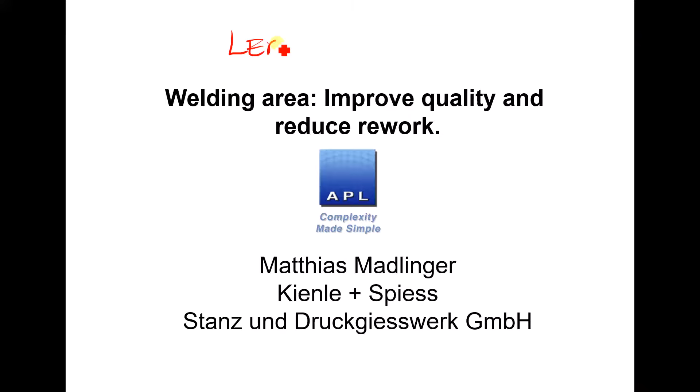Let's get into this case study, which is very much Lean and Six Sigma working together. The ultimate project you're going to see is about improving the quality of welding. But first we have to find that problem. There's a certain amount of German on these slides, which I apologize for in advance, but it was a German client. So let's take a look at what's going on.

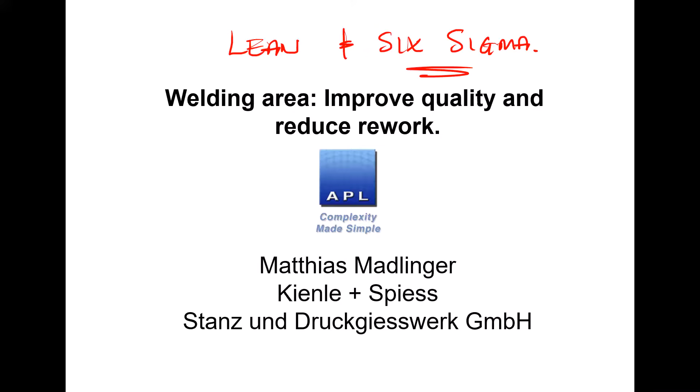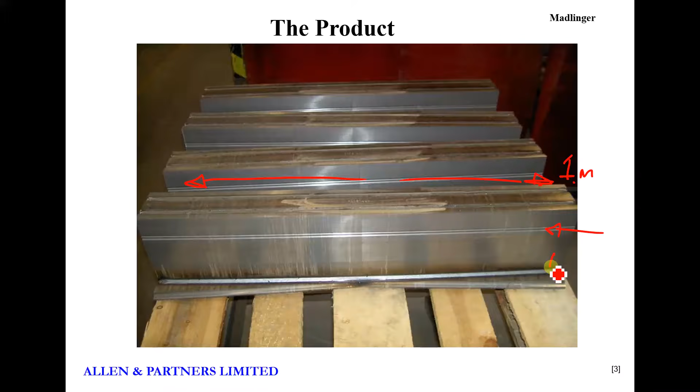Here's the product. Let's have a look. It's about 1 meter wide, this thing. It's an iron core that is part of power generation equipment. So it goes into a power station. The iron core is part of the large transformer that creates electricity. So you don't want this thing to fall to pieces.

And the way that it's made, you have slices of metal here, you can just see them. And then what we do is we weld across the top and across the edges to weld all these pieces together to form the iron core. So that's the product, that's what we're making.

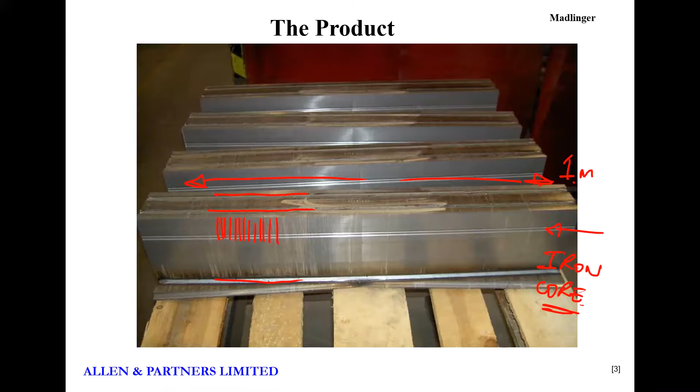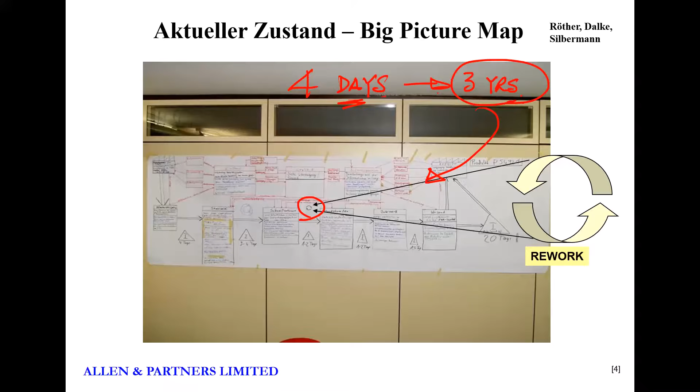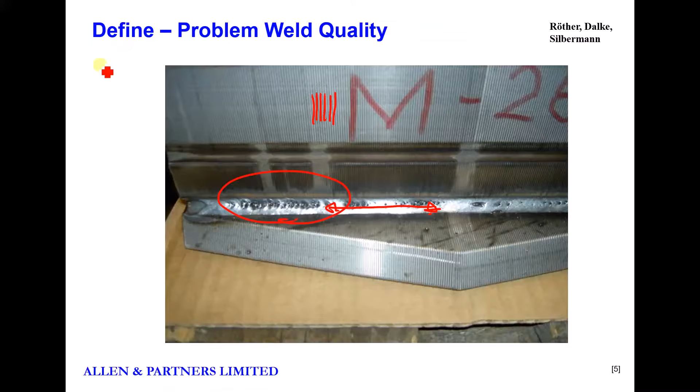So that's our problem. Now, it's a technical problem. So once you get a technical problem, we've been looking at a lean tool, we've been looking at a value stream map, a big picture map, but now we have a technical problem. And the minute you have a technical problem, well, I'm going to switch toolkits, because suddenly this is a Six Sigma problem. It is a perfect Six Sigma problem.

Now, one of the things we need to do before we get this project up and underway, we're thinking about define and measure in the early parts of the project. The current problem, the current measure, look, is the welding looks terrible. That's not really a great measure. We need to find a better measure in order to make the problem easier to understand.

Now, talking to the team, I'm not a welding expert, but talking to the team, what they said was, you get these dots of spatter. The dots of spatter are a bad sign, that's bad welding. So the more dots of spatter we get, the worse the weld is going to be. So they're saying the dots of spatter is the indicator of a bad weld.

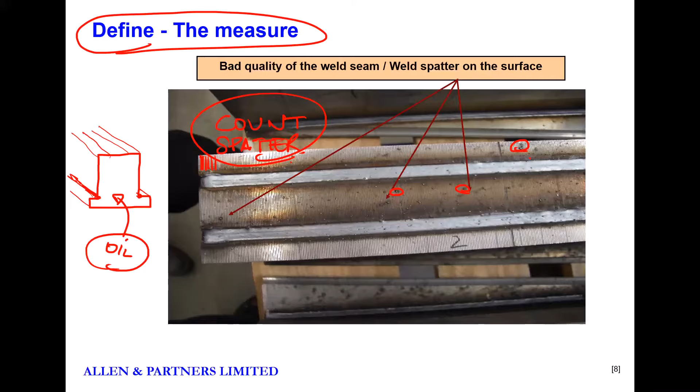Okay, so they're pressed, and one of the things they think is wrong is that they are getting oil, cutting fluid contamination on the parts, and when they try to weld it, it smokes, and that's what's causing this problem here. So that's one of the things that they want to test.

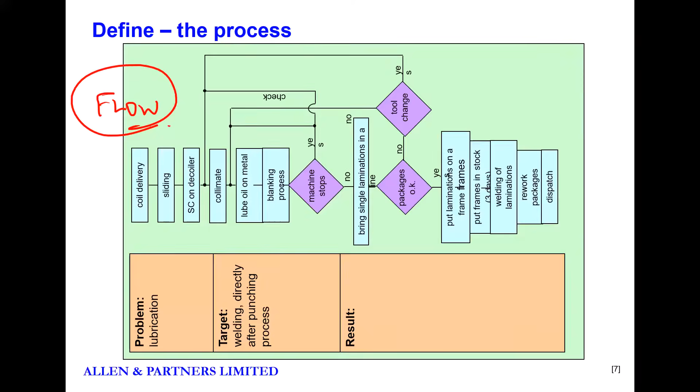Now, if you took a very traditional approach to this problem, which is a 1-factor test, in other words you check the gas type and you do some tests, then you take the tip condition and you do some individual tests, each time changing 1 factor at a time. Think about this—we'd need samples for each test.

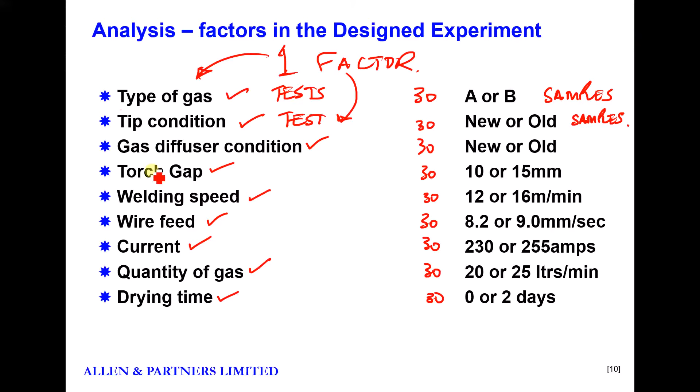Now, what I can tell you is if you used a proper sample size calculator, the likelihood is it would tell you to get 30 samples for each of these. Now what did we say we got? 1, 2, 3, 4, 5, 6, 7, 8, 9. 9 thirties. You need 270 pieces to do this.

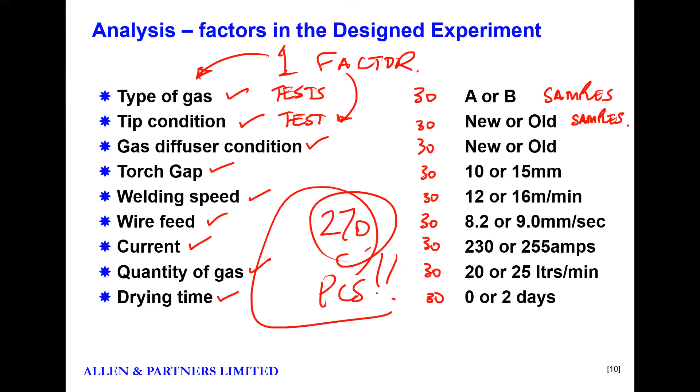That's if you take what's considered to be the professional route, the 1 factor at a time route. We're not going to take that route, however. We're going to do a designed experiment. And one of the reasons is because all that one factor testing is pointless. Because look at this.

Look how many combinations we have. We're going to have two gas types, two types of tip, two types of diffuser. I'm going to just say 5 choices for the torch gap—we could go 10 to 15 millimeters. Obviously it could be finer than that, but to be quite honest, I don't think we could measure it that accurately. So we're going to have 5 choices on the torch gap.

Then there's 4 for the welding speed. Now again, this is probably more than this because the adjustment of the machine could probably go in tenths, but we're just going to go with 4 there. Then we've got 8 for the wire feed. Then the amps—well we got 230 to 255 amps, so there's 25 choices there. Then there's the litres of gas—there's 5 choices there.

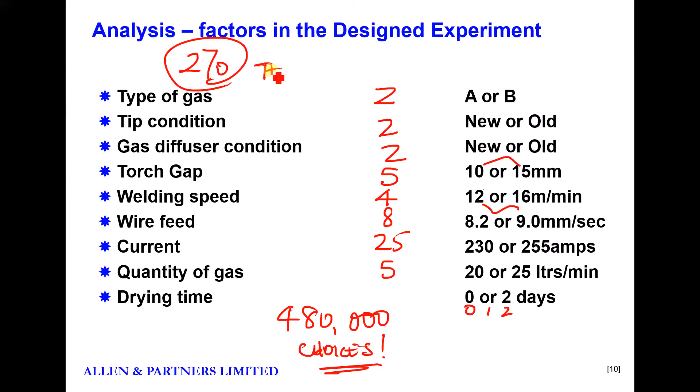And we could be doing 270 tests. Look at those big pieces, these things that are a meter long, for Christ's sake. Do you really want to be making 270 of these things and throwing them in the bin and maybe not even finding the answer to the problem? So that's the scale of the problem. So we are not going to approach this in what's known as the common sense way, or indeed the professional way in that sense. One factor at a time is not good enough.

It's not fast enough. Here's the power of Six Sigma. What are we going to do? We are going to do a designed experiment, a DOE. The DOE, by the way, is going to recommend 12 tests. The DOE is a pattern—it is a pattern that is recommended as the fastest way to find out. Out of those 480,000 combinations, we want to find the best one. How do we do it in the shortest possible time? You use a design of experiments.

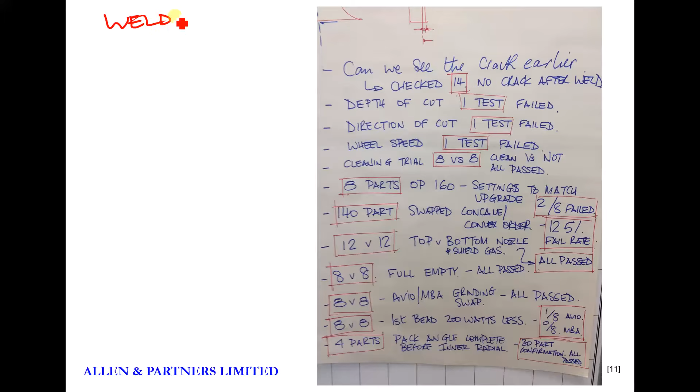Now let me just show you. This is a different welding problem, but this is also a welding problem, and this engineer used his own skill. This is a client of mine—I taught them design of experiments, and for some strange reason the engineer decided to go his own way. This is a picture of a flip chart that we created when we were trying to figure out whether he learned anything or not for all the work he'd put in.

Look at all the pieces that he's used. By the way, these are expensive pieces. These are castings. They always tell me that these castings are expensive and they don't want to use too many. But look, he did some tests. He used 14. Then he checked the depth of cut.

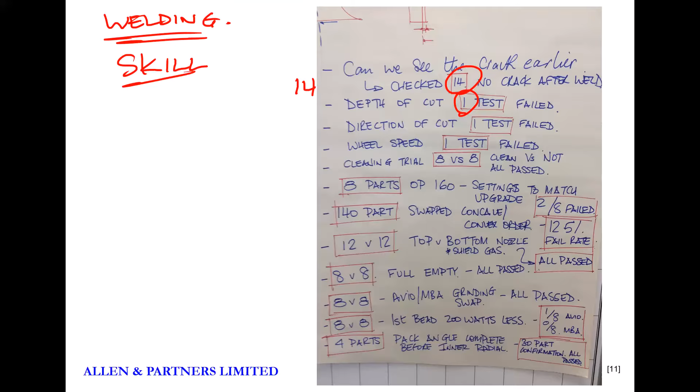He did 1 test. By the way, what do you think of a sample size of 1? Doesn't tell you anything really, does it? But anyway, he did a test. He did 1. He did another test. Didn't tell him anything. He did 1. He did another test. He used 1.

Then, well, he's getting a bit smarter now. He used 16 pieces to do a 1-factor test about cleaning. Then he used 8 parts to see if a similar part, but that was slightly different, was any better. He used another 8 parts. Then he changed the processing conditions. He used 140 parts, 140 samples.

Okay, then he did 12v12. What's that? That's 24 pieces. Then he did 8v8. And again, what's he doing? He's doing a one-factor test. Then he does another one-factor test. He uses another 16 pieces and another one. And finally, 4 pieces at the end.

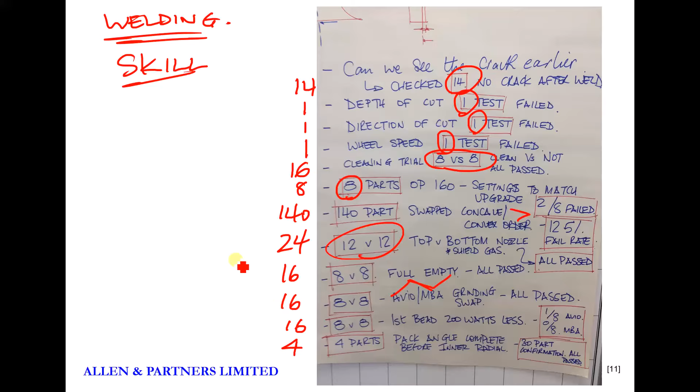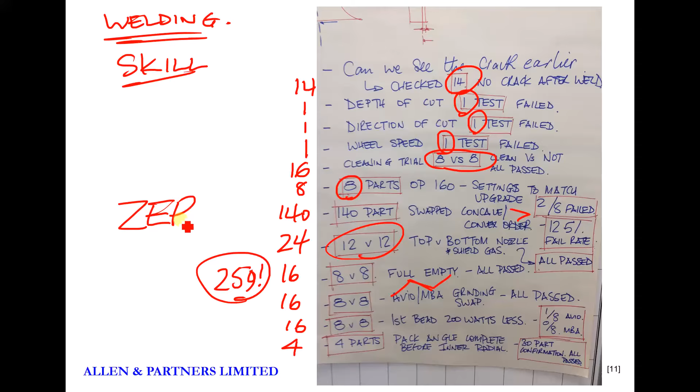He used 259 pieces. And when we got to the bottom of the analysis that he'd done, what did we decide he'd learned about the process? We decided he'd learned zero about how to solve this particular problem.

This is a pointless way to work. Using your skill can never deal with this. You can never carry this in your head. So what we're going to do is a designed experiment.

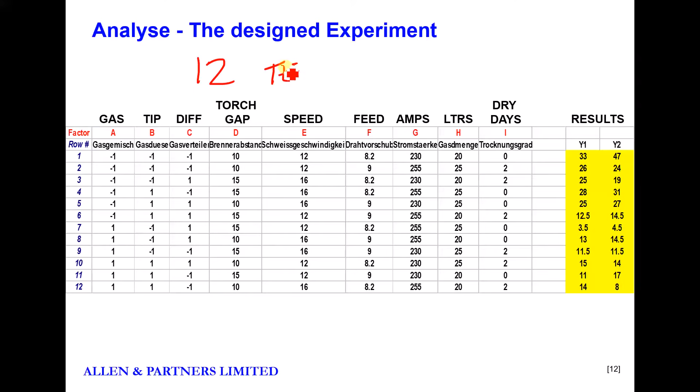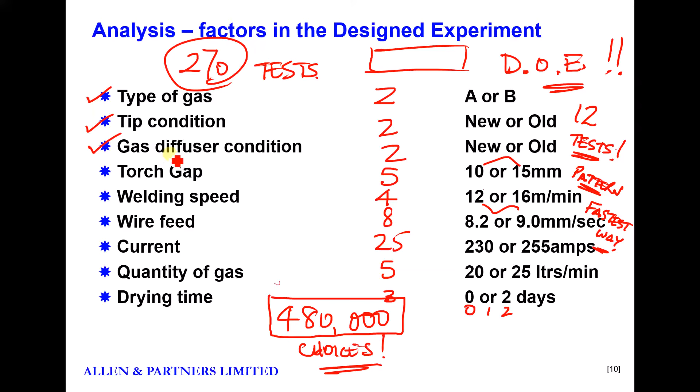The designed experiment recommends 12 tests. Yes, just 12. Okay, so each one of these, now it's in German, so each one of these is one of those variables. So, you know, the first one, gas type, tip condition, gas diffuser condition, etc. So that's these things here. It's telling us the test pattern.

Here is the measurement. By the way, look at the sample size. We are only going to use 24 pieces to find out what 9 variables are doing to this process. How efficient do you want to be? That's just 3 pieces.

It's 3 pieces per dial. It's the most efficient way. It's the fastest way to find out. The measurement is the spatter. So we are counting spatter. Okay, 24 pieces.

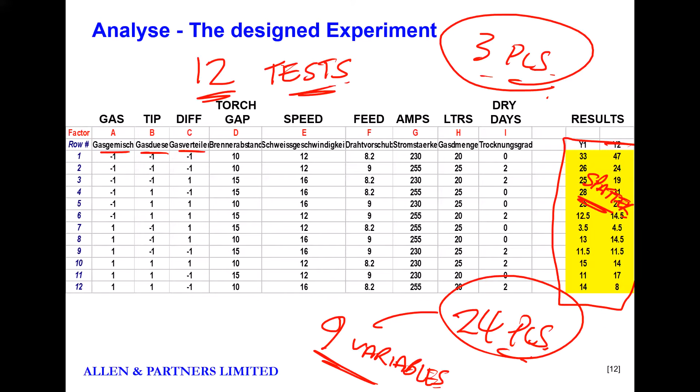Once we've done the DOE, we then do a simple graphical analysis that looks like this. Each line represents a variable. If the line is long, the variable has a big signal. So the first one, which is the gas type, has a huge variable in terms of the amount of spatter that we have in the process.

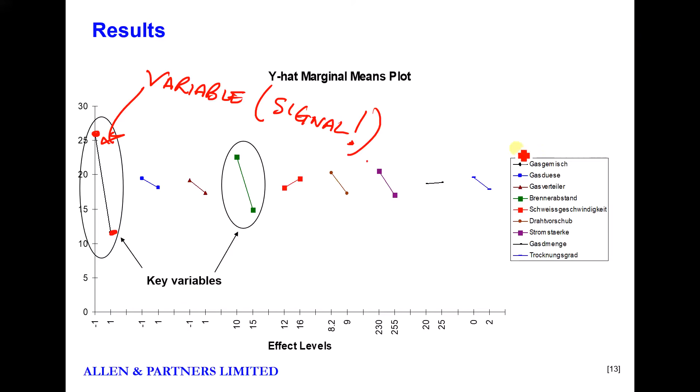Now, using this graph, it's very simple. We want to be lower. Okay, it is a lower the better problem. So where are we going to be? We want to be at this end, which is telling us to use this gas. We want to be here. We want to be here.

We want to be at 15 on this one. We want to be at 12 on this one. We want to be at 9 on this one. Lower the better, 255 on the amps. This one is flat, really doesn't make any difference. This one, well, we want to be at 2 there.

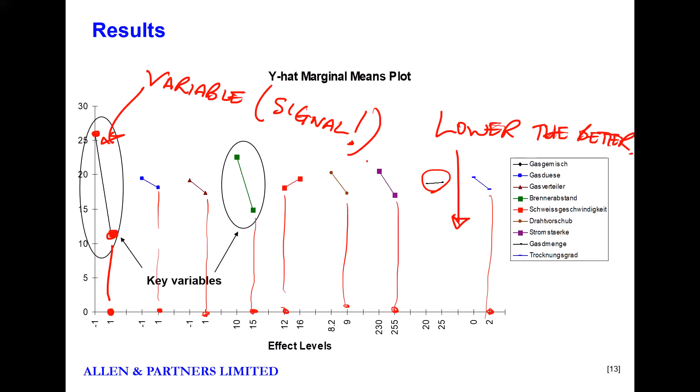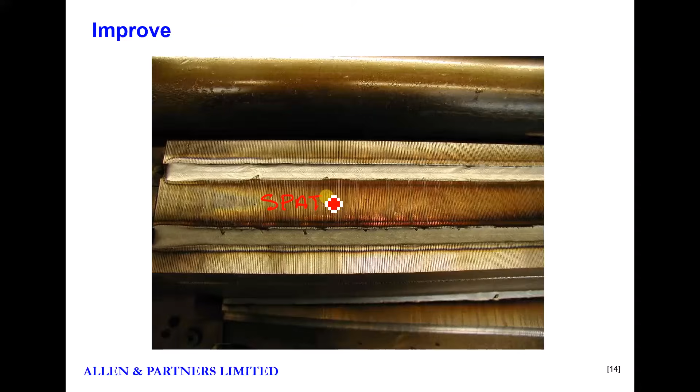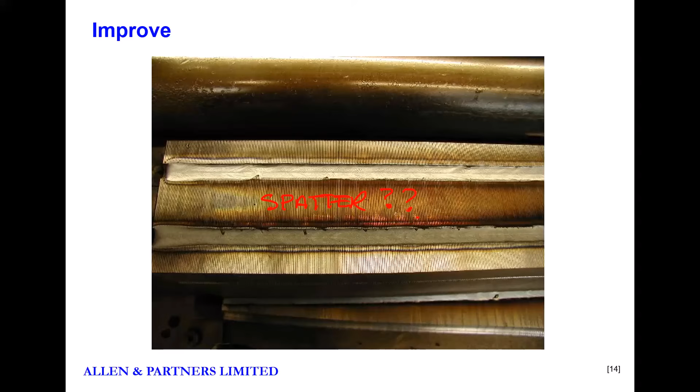Now all we have to do is dial those into the process. Dial those settings in and let's see what happened. And that's exactly what we did. Look at the spatter. Can you see any spatter at all? Perfect. A perfect weld.

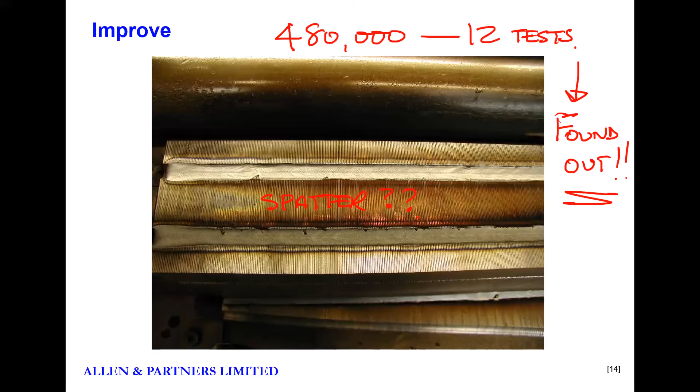There was 480,000 combinations. We did 12 tests, and from 12 tests we found out. This is so much faster, so much better than skill. No other technique beats this. DOE, it's the fastest way to find out.

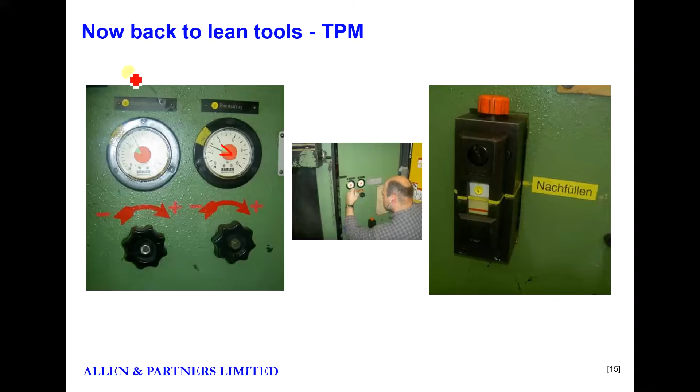Now, of course, we can go back to lean type tools, and we can start putting visual signals on some of our settings here. Yeah, so now we're doing TPM type work, we're doing lean type work, we're doing visual management type work. So we started off with the value stream map. Then we went to Six Sigma, did some DMAIC. Now we're back doing TPM.

What a great example of Lean Six Sigma. That is the way these tools work together. They are the most fantastic techniques. And if you want to do this, if you want to save loads of money, and if you want your processes to be running at the absolute best settings, this is the only way to do it.